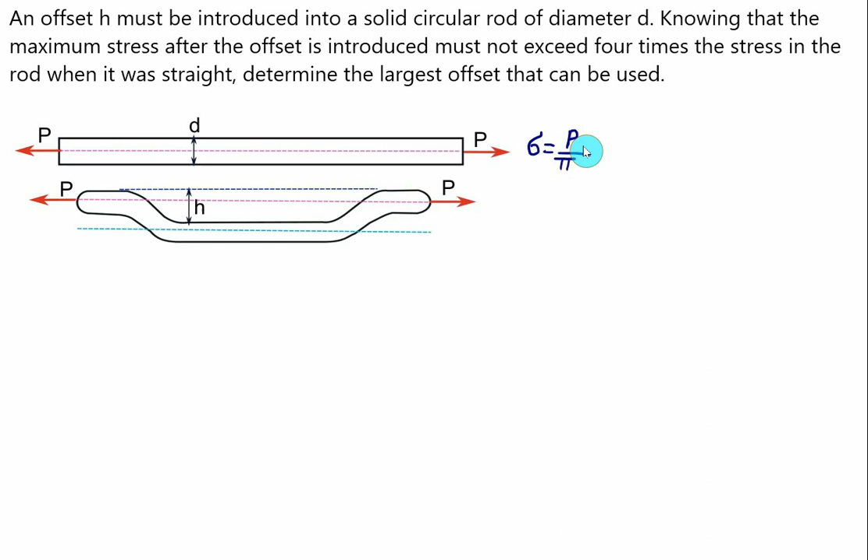Originally, when the bar is straight, we have stress sigma equal to P divided by the circular area, which is pi by 4 d square. So P divided by pi by 4, the 4 will shift to the numerator, so we have 4 times P divided by pi d square.

Now maximum bending stress will occur at this point, and the distance between the centroidal axis of the horizontal portion and the centroidal axis of the offset is the same as the distance between the top fiber of the horizontal position and the top fiber of the bent position. So the distance A to B is the same as the distance between the two center lines. This is our offset, and this offset distance e is equal to h.

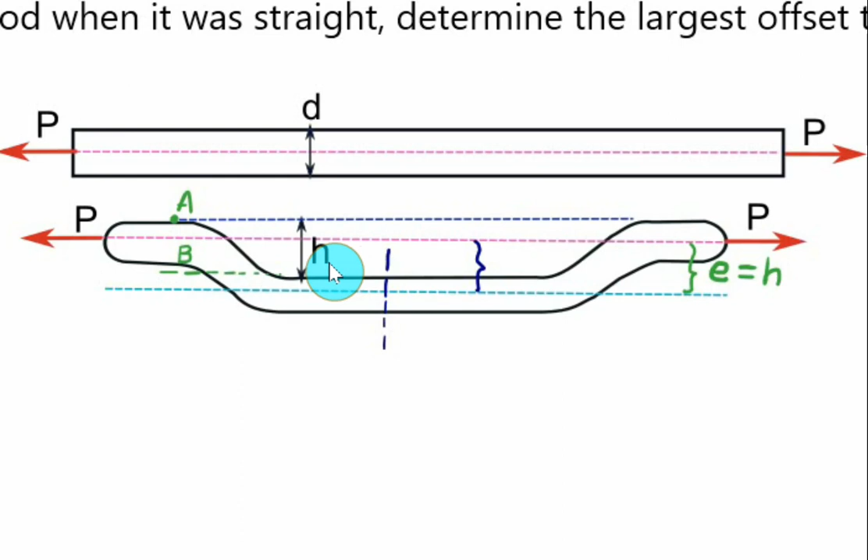In the straight portion the top fiber is A and the top fiber of the bent portion is B, and the distance between the top fibers of both portions is given as h. It means that the distance between the centroidal axes is also equal to h. So we have eccentricity equal to h.

Let's call this point C and this point D. At these 2 points we have the maximum value of stress, because we have axial stress and bending stress. If we cut at this section, we can show one internal reaction. This internal reaction will be exactly opposite and have the same value as P because of sum of Fx.

So sigma maximum will be axial stress, force F divided by area A, plus bending stress M multiplied by y divided by I, where with diameter d, y is d by 2. The given condition is that the maximum stress should not exceed 4 times the original sigma when the bar is straight, which is P divided by A. So sigma max equals 4 times sigma.

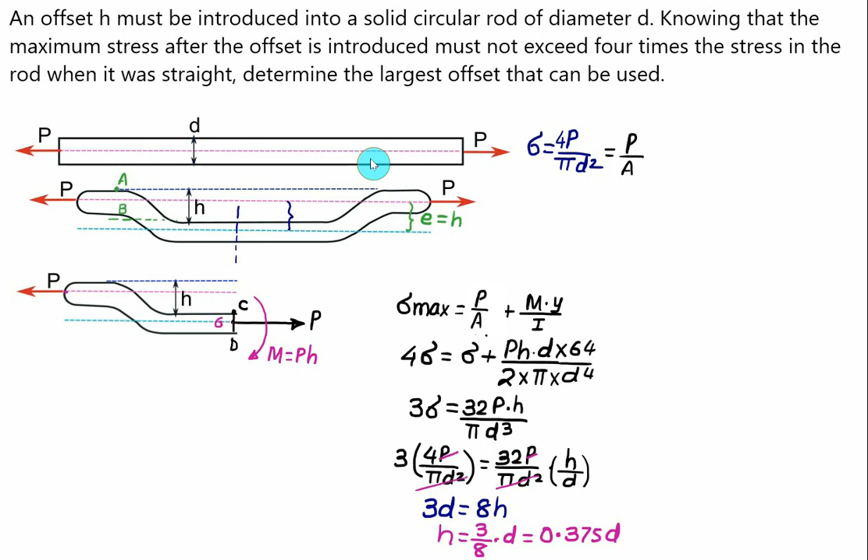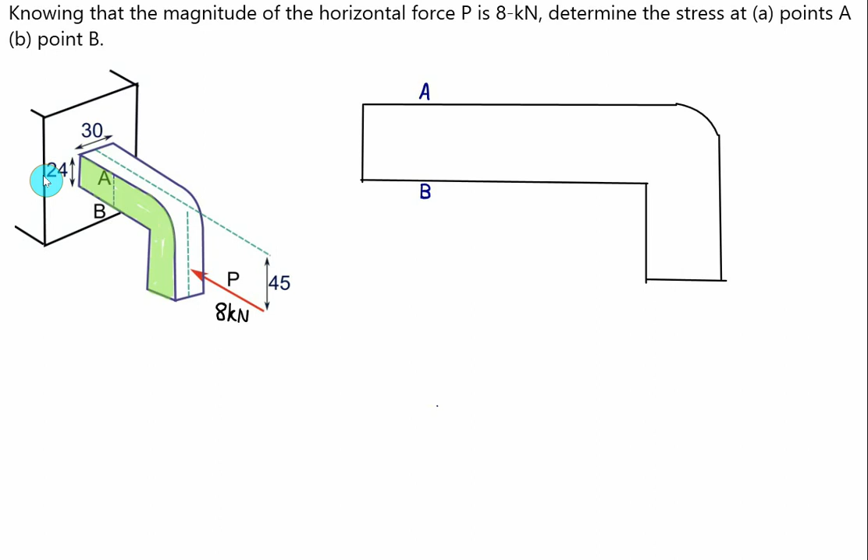This total height here is equal to 24. So we have depth D equal to 24, and the width, which is perpendicular to the board, will be equal to 30 mm. So in this case we have width B equal to 30 mm. This one is representing the centroidal axis, and the centroidal axis is at a distance of 12 mm from A, as well as 12 mm from B. So both these distances are equal to 12 mm.

The force P is passing through the centroid of this rectangle at a distance equal to 45 from the top edge. So this distance is 45, and through this point the force is passing, and this force is P with a magnitude of 8 kilonewton. This one is representing the centroid of section AB, and the centroid of section AB is at a vertical distance of 45 minus 12 from the line of action of the force.

The distance between the centroid and the line of action of the force represents the eccentricity. The distance between A and where the force is acting is 45. From this you have to subtract the 12. So 45 minus 12, equal to 33, will be the eccentricity. So let's make a cut near the section AB and we'll show the internal reactions.

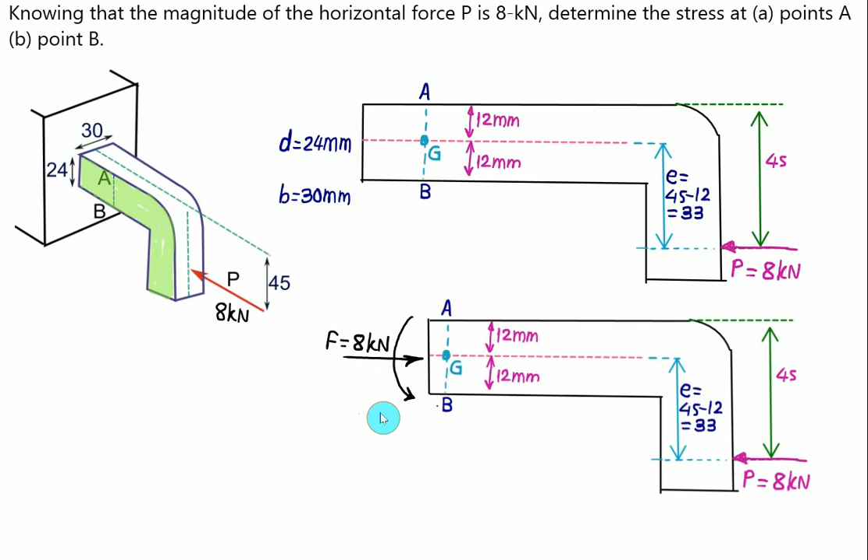This force is acting to the left, so the internal force will be acting in a rightward direction. Let's say this force is F; sigma Fx is 0, so P and F are the same value, equal to 8 kilonewton. This force below G will make a clockwise moment, so you have to show here an anti-clockwise moment. The anti-clockwise moment M is equal to the force P multiplied by the eccentricity. We have force equal to 8 kilonewton, multiplied by 10^3, and the eccentricity equal to 33 mm, so this answer will be in Newton mm.

Because of the moment, bending stress is produced, and because of the force F, compressive stress is produced. The compressive stress at A and B is equal and negative, because compressive you have to take as a negative value. This one is representing hogging, so for hogging you have to take the negative value of M, which is minus 264 × 10^3 Newton mm. For point A, the distance YA is positive, equal to plus 12 mm. For B, the distance YB below the centroid you have to take as negative, equal to minus 12 mm.

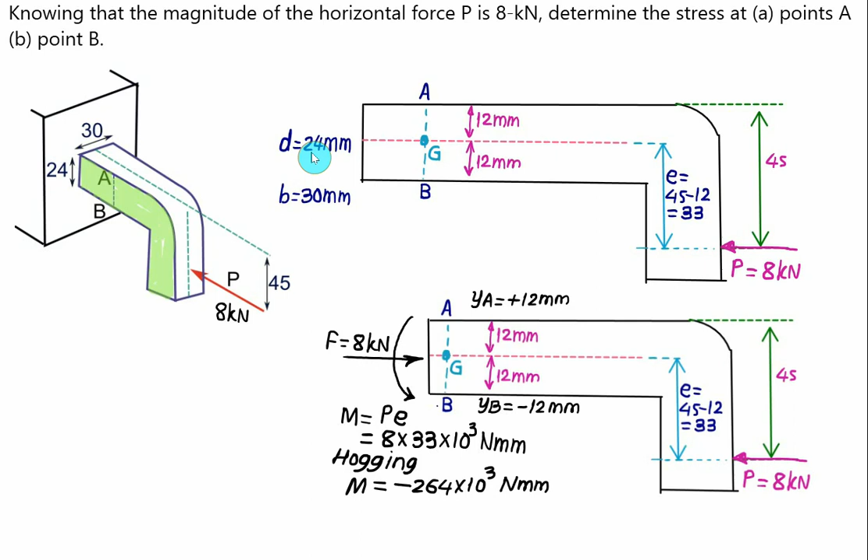Using Ya, Yb and the moment, with breadth equal to 30 and depth equal to 24, we can calculate the bending stress at point A and the bending stress at point B. So we'll continue with this figure.

We just want to analyze here what is the stress produced at points A and B due to the force and the moment M. In this case the force F will produce a compressive stress, and the compressive stress sigma C is P divided by A. Since it is compressive, we take it as a negative value. The force P is the same as the force F, so we can write minus F by A. And this value is minus 8000.

The cross section is a rectangle with width equal to 30 and depth equal to 24. Area A is B multiplied by D. So this much megapascal will be produced as a compressive stress, equal in magnitude for A and B: minus 11.11 megapascal, the same for point A as well as B. A and B both are in compression.

And the bending stress we can calculate. For the bending stress sigma B, we have minus M multiplied by Y divided by I. Let's calculate I first because that is a common term. For a rectangular section, I is equal to 1/12 multiplied by breadth multiplied by D cube. So we have 1/12, width equal to 30 and depth equal to 24 cubed, which is 34560 mm^4.

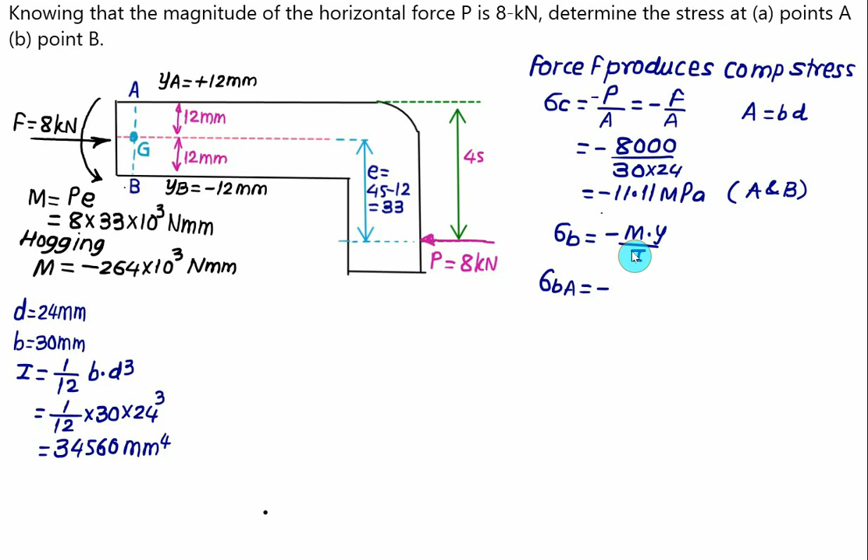Now we can calculate the bending stress. For point A, put Ya equal to plus 12 and I equal to 34560. So bending stress at point A equals minus M, and M is a negative value, minus 264 × 10^3. M is minus because it's hogging. Ya is equal to 12, divided by the moment of inertia 34560. So this value is 91.66 megapascal.

Point A is the top fiber, which is in tension. For the bottom fiber we have compressive stress of the same magnitude, because Ya is equal to Yb. Only the value of Y you have to take as minus 12. So we have minus 264 × 10^3, and the Y distance, since it is lying below the centroid, is negative, minus 12, divided by moment of inertia 34560. Minus and minus is plus, and again minus gives minus 91.66 megapascal.

So individually we know the stress at A and B, the axial and bending. So we can calculate the total stress at point A: sigma equals sigma compressive plus bending stress at point A. Compressive stress is minus 11.11 and bending stress at point A is positive 91.66. So approximately this comes out to be 80.6.

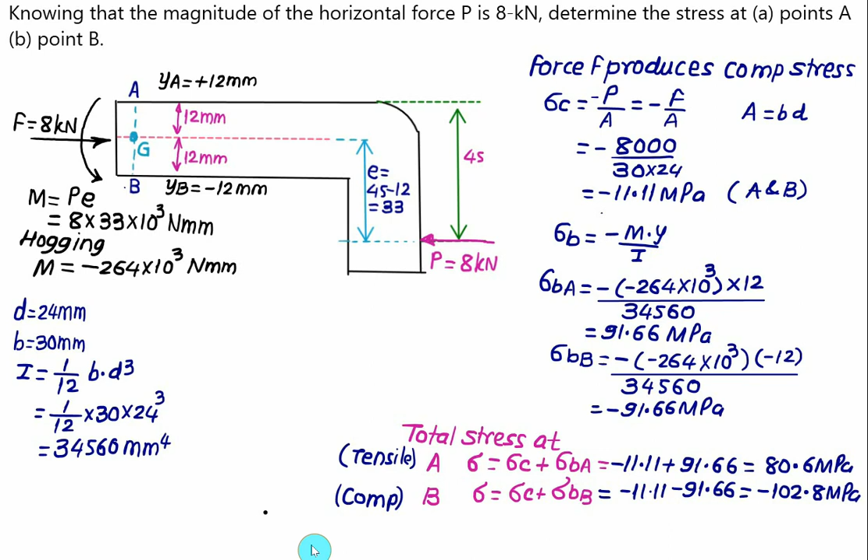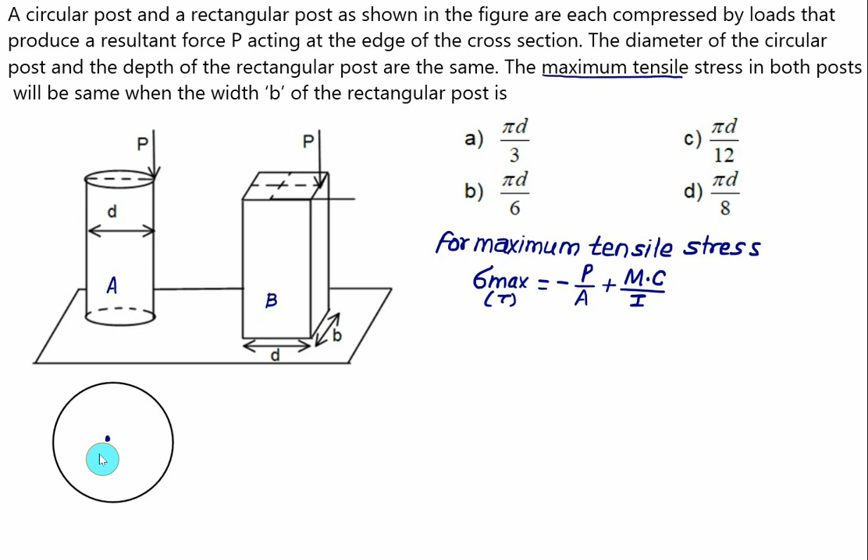In this case, the circular post's centroid is represented by G, where the horizontal axis is represented by Z and the vertical axis by Y. This is a standard procedure for us. We have diameter equal to D, so the maximum stress will be at the outer fiber. As far as the moment of inertia of the circular section is considered, we take the moment of inertia about the y-axis, because this is the point P, and if we shift the force at point P, it will be shifted here, and this force will make a moment about the y-axis.

So this is our y-axis and this is our z-axis, and this force has an eccentricity equal to d by 2. So in this case the eccentricity E is d by 2, and this force will make a clockwise moment, but that moment takes place about the y-axis. So it will develop a moment about the y-axis. This is moment M, and this moment is P multiplied by E.

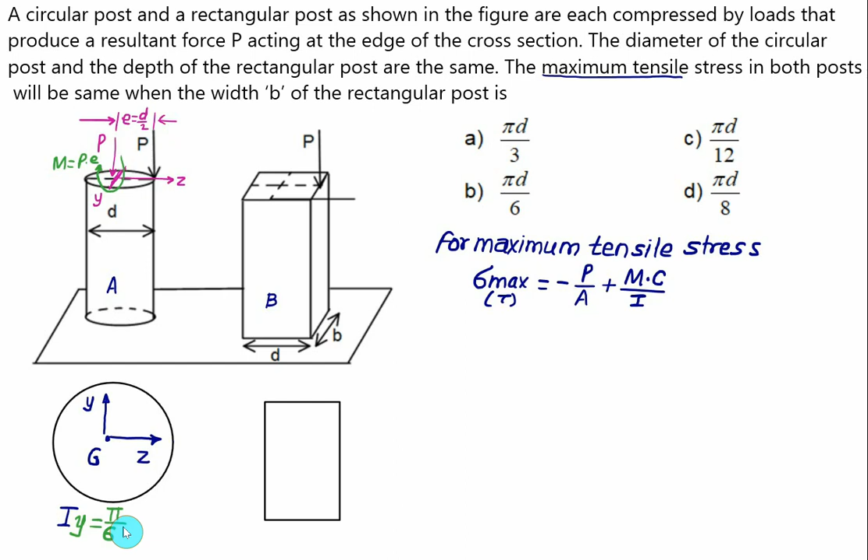So you have to take the I value, and the I value for a circular section is pi by 64 d to the power 4, and the distance C will be equal to d by 2. So maximum stress will be produced either at this point or at this point, that is along the z-axis. Whereas in the rectangular post, this is the centroid, and again this axis is our y-axis, and the moment is taking place about the y-axis, and this moment is again a clockwise moment.

And if you take the perpendicular distance here, the force shifted is equal to P, and the eccentricity this time is the same as the previous value, equal to d by 2. So eccentricity is d by 2. The centroid we can locate here, and we can fix the system here. Horizontal axis is Z, vertical axis is Y.

So this time the moment of inertia I about Y is parallel distance multiplied by perpendicular distance cubed divided by 12. As far as the y-axis is considered, the parallel distance is B. Perpendicular to the y-axis is distance D. So we have B times D cubed divided by 12. These are the points that will get you confused. So remember the definition of IY: parallel distance to Y multiplied by perpendicular distance to Y cubed divided by 12 in the case of a rectangular section.

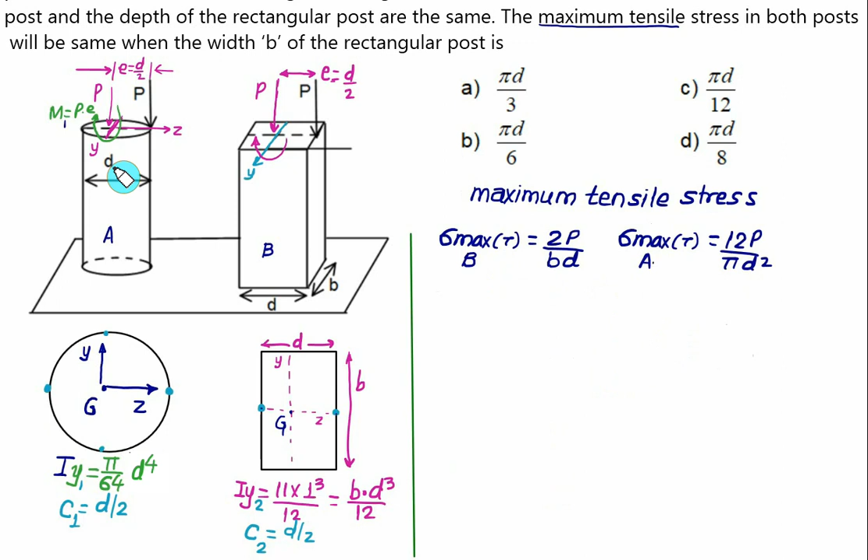So as per the given condition, the maximum tensile stress in the circular post and the rectangular post is same. It means that 2 times of P divided by bd is equal to 12 times of P divided by pi into d square. So clearly here 2 gets cancelled, so we are left with 6, and one of the d is cancelled, so only d is left here.

Finally we'll cross multiply here. We have 6 times of b is equal to pi into d. That is, width b is equal to pi by 6 multiplied by depth d. Our choice B is correct choice.